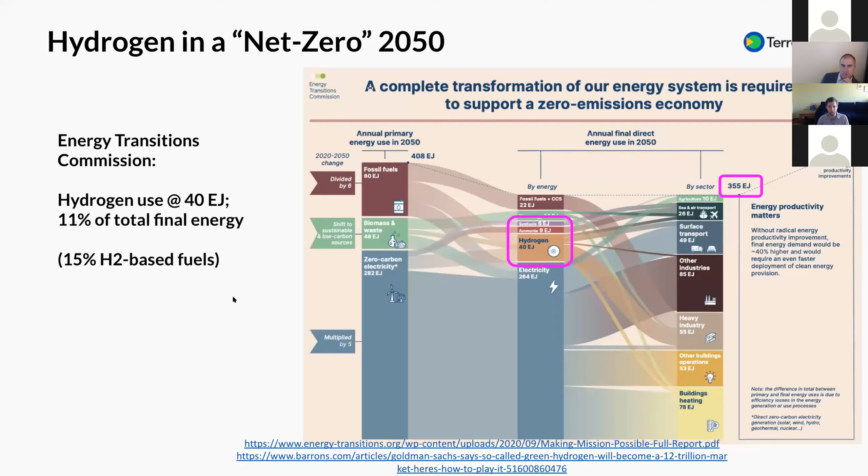I would summarize that there are 3 industrial applications. One of them is a feedstock for chemicals. So you take the hydrogen molecule and you make it into a different molecule, and that's largely ammonia and refining. Obviously in a net zero future, there would be a lot less refining going on. And then we have steel. Hydrogen is a key element of a new steel process, I would say the most popular net zero technology that we're seeing deployment for.

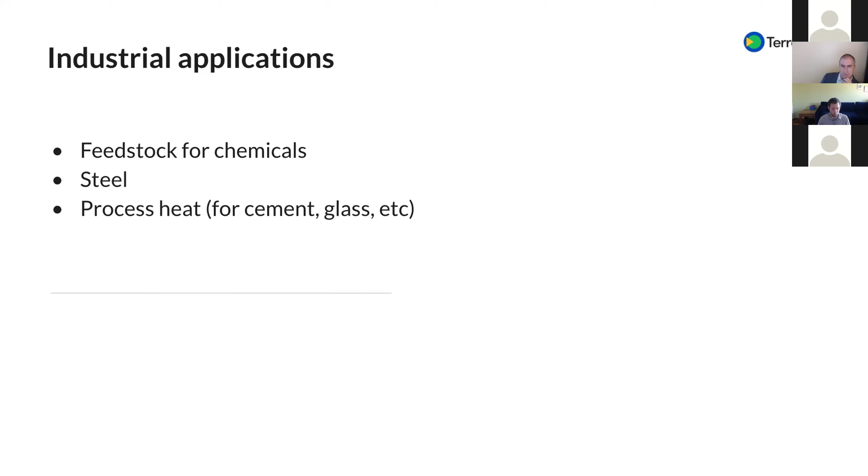And then finally, the third industrial application is industrial process heat. When you need very high temperature industrial heat to cook a bunch of rocks into cement, it's hard to do that with electricity. And hydrogen is one of the possible routes to decarbonization.

And so here's a graph that shows on the bottom all the hydrogen that would be required in order to power that net zero graph that we saw earlier. And this is all the hydrogen that is part of these industrial applications that I just described. As you can see, this is a big chunk. About a third of the hydrogen that would be globally produced in this net zero 2050 scenario would be used for feedstock for chemicals, for steel, and for industrial process heat.

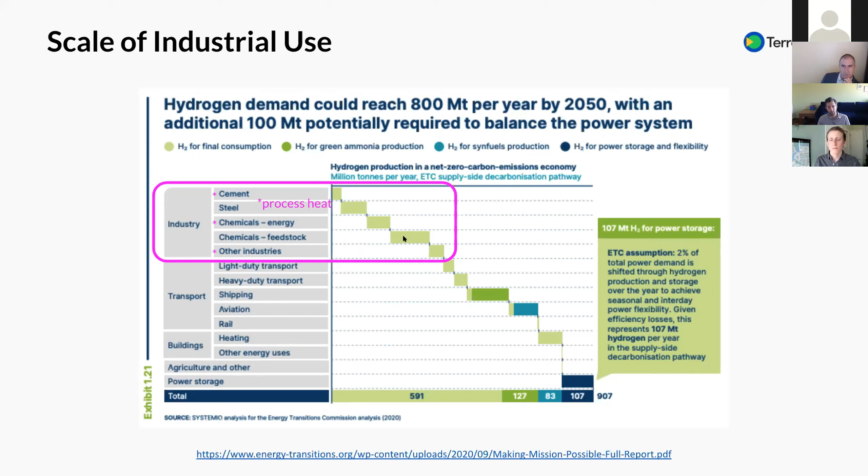And that covers the industry sector. We're going to talk a little bit about transport. So this is also a very significant component of decarbonization. This is another third or so.

One thing I want to call out is that light duty transport, which is kind of a big thing that you hear about if you go and Google, like, what are we using all hydrogen for? People will talk about fuel cell cars, but I would say also that there is kind of an emerging consensus that batteries are going to be much more important than hydrogen for light duty transport, and that may even be true for heavy duty transport, although there's a better fit for hydrogen.

Basically, the reason to use hydrogen is that it carries more energy per unit of weight than a battery would. And this becomes especially important when you get to shipping and aviation. So there's no way to cruise across the ocean with 13,000 containers on battery power. There's not that many batteries in the world, and they would sink the ship. It's too heavy. Same story for transatlantic flights.

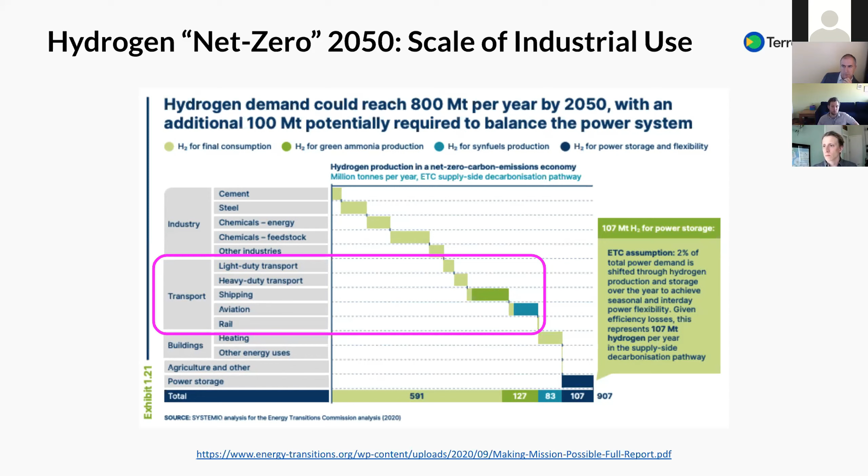I'm going to skip this. So that's all that I wanted to cover about transport.

The applications within the power sector are the most complex, and I want to spend most of my time in this sector because I think it's really worth understanding. So what you can see here is that power looks like a very small sector here, and ETC has hydrogen powering about 2% of total power demand, but actually, as we'll see in the next couple slides, the story is much larger and more complicated than that.

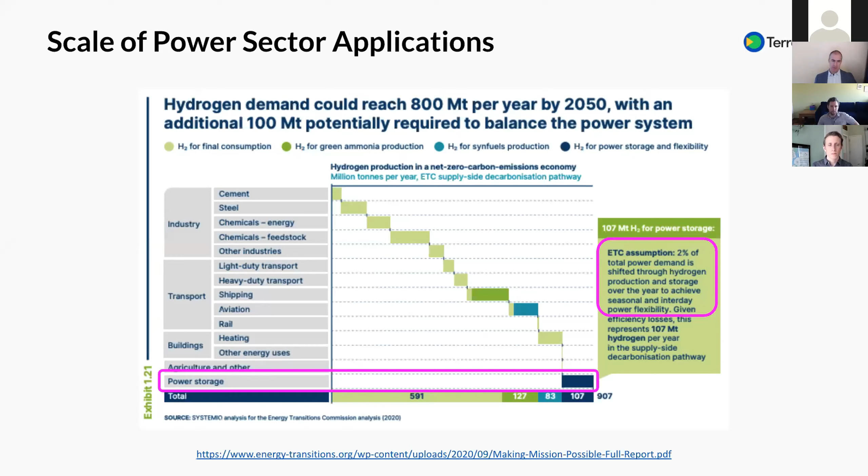So the most simple and straightforward way to understand hydrogen's interaction with the power grid is thinking about hydrogen as a kind of weird battery. You take electricity, you turn it into hydrogen, and then when you need electricity again at a later time, you turn the hydrogen back into electricity with a fuel cell or by setting fire to the hydrogen and powering a turbine.

And hydrogen's properties as a battery are that it is very inefficient. It is kind of expensive, but it is one of the only cheap ways when you start trying to store incredible amounts of energy or trying to derive continuous power for days on end. If you need a battery that can offer that kind of performance, it's really one of the only viable options aside from pumped hydro. And there are other emerging possibilities that are arguably better than hydrogen.

But when we think about hydrogen as a straightforward electricity storage technology, that's what we're talking about. It's an inefficient battery that you can run for days, whereas most lithium-ion batteries, for instance, can just hold about a few hours of power.

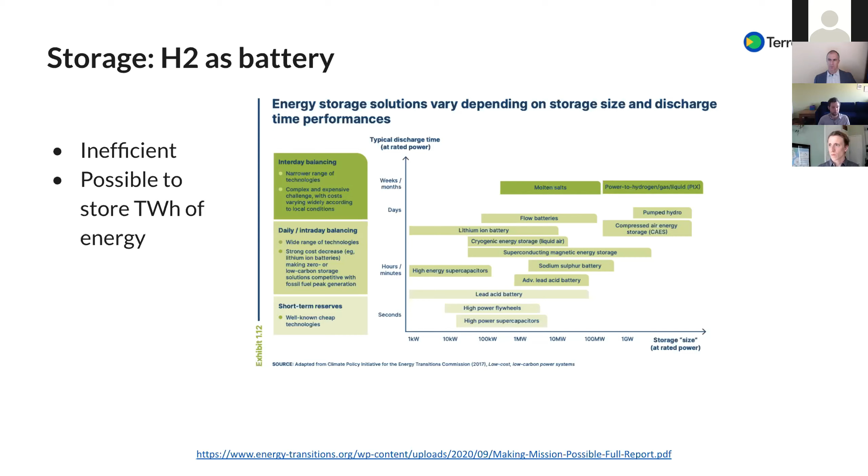But actually, hydrogen's role in storing power is a little bit more complicated and interesting than that. Often you hear about hydrogen being useful because it can make better use of variable renewable electricity. And actually, I think this is an important part of hydrogen's story.

Gosh, I need to redo this slide. Bear with me through this confusing slide.

Sometimes you will hear the story about how we are wasting a fair amount of renewable electricity already. I live in a state, California, that has a lot of variable electricity on the grid, and I think in a recent month there was over 10% curtailment, which is a fancy word for we just threw the energy away. We just threw it on the ground. It's sort of like there was too much sun and we didn't need all that power,

and so we just wasted it. And sometimes you might hear about the idea that you can make hydrogen out of just this curtailment, and that's actually not feasible for kind of complicated reasons. But hydrogen plays really well with variable renewable electricity. It can help use this curtailment and also other renewable electricity, and help make better use of this power.

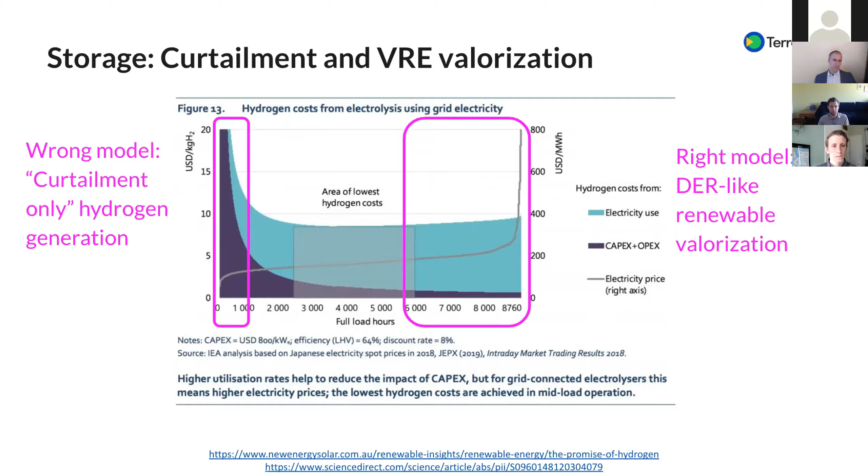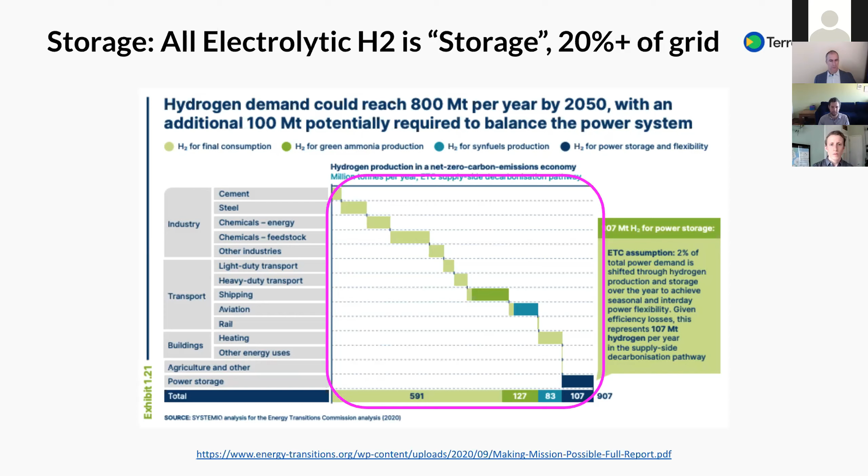And so in that sense, I want to make an analogy that actually all electrolytic hydrogen is energy storage. If you produce all this hydrogen that's in all of these sectors from electricity, in some sense it's all energy storage, it's all power storage, and it's a way to make something useful out of energy that happens at the wrong time of day. This is just a different way of thinking about it. But when you think about power storage, hydrogen is sort of this weird sector-spanning storage machine.

Anyway, moving on, the rest of this is more straightforward. Hydrogen is one of the only green sources of firm dispatchable power. So Los Angeles recently had to make plans to replace its last coal plant, and they have a pretty aggressive decarbonization timeline. I want to talk about their story as a case study. So they took this coal plant and they replaced it with an 800 megawatt gas turbine.

At time of operation, that turbine will mostly be powered by fossil gas and about 30% by hydrogen. And by the time their decarbonization timeline hits, which I think is 2035, it will be powered by 100% green hydrogen. And the interesting thing about this power plant is that it's located on top of a geological formation that makes it very cheap to store incredible amounts of hydrogen.

You could store terawatt-hours of hydrogen in this geological formation, and what this allows LA to do is, they need to be able to power the grid when the sun isn't shining, or when the sun is shining too high and everyone's got their AC on, which is a thing in LA. And hydrogen is a part of how they can do that. Yeah.

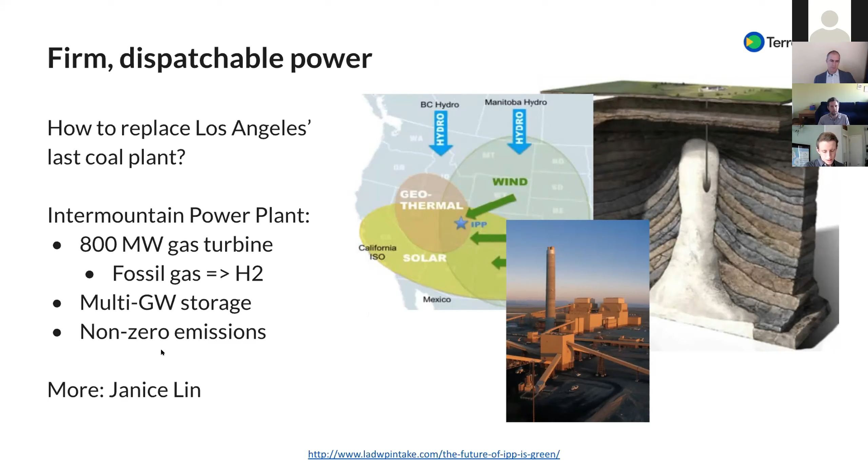So countries with a surplus of energy that want to export it can do so using hydrogen or ammonia, which is kind of like hydrogen zipped up in an easier to ship molecule. And Japan is one of those countries that, if it had to power itself on wind and solar alone, it would have a very difficult time doing that just geographically.

And Europe as well is expecting to need to import a lot of hydrogen for different applications. So hydrogen is a useful way for countries with a surplus of net zero energy, especially renewable energy, to make money off of it and power the decarbonization of other countries.

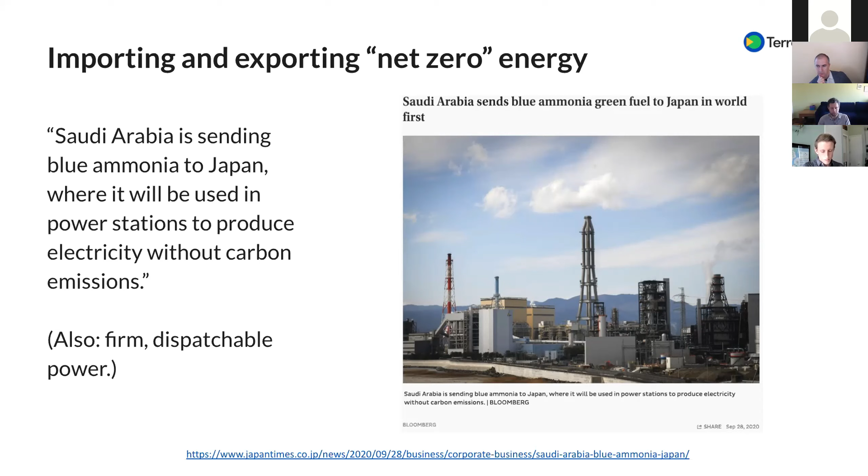And the final set of applications within the power sector is backup and mobile power. So microgrids, off-grid applications like mining, data centers. There's a lot of relatively small applications, but still quite large, still multi-billion-dollar applications.

And I want to mention that these applications are going to be especially important during these early expensive years of hydrogen. A lot of these are actually drawing a lot of investment and paving the pathway for these larger scale applications within the power sector.

And that's it. That's the material that I wanted to cover together. And look at that, right to the minute.